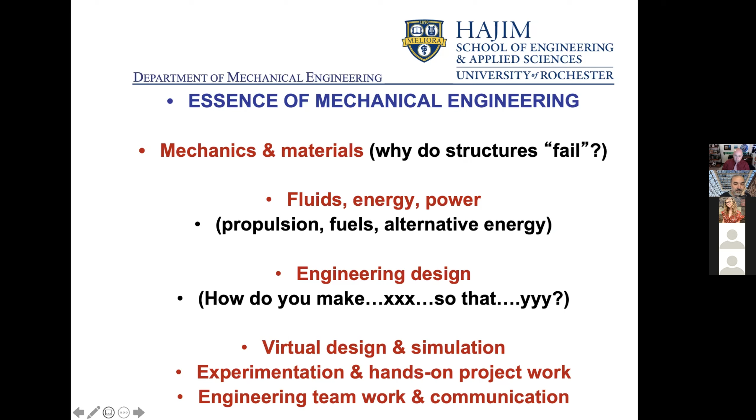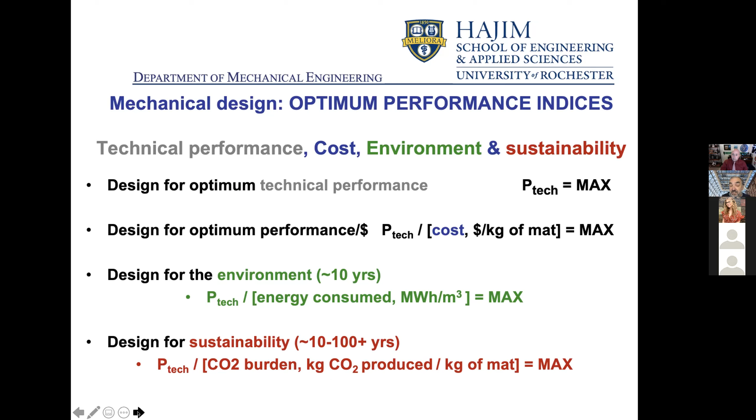One important point I want to make is that engineering, again, is a very social type of discipline. In addition to the engineering design topics I just described - technical performance, cost, environmental effects, sustainability - there are some very important ethical questions that all engineers must actually deal with. For example, there's a very strict code of ethics, professional engineering ethics.

And this is the sort of topic that I will always ask high school students or first year students: true or false. The statement is that engineers, in the fulfillment of their professional duties, must carefully consider the safety, health, and welfare of the public.

And this statement is actually false, because carefully considering the safety, health, and welfare is not good enough. Carefully considering something doesn't mean that we have given the most important aspect in the design to the safety, health, and welfare of the public.

Therefore, the true version of this statement is that engineers shall hold paramount the safety, health, and welfare of the public. Again, there's a very important emphasis on the ethical responsibility of the engineer, because what we design and what we put into practice affects people's safety, health, and welfare.

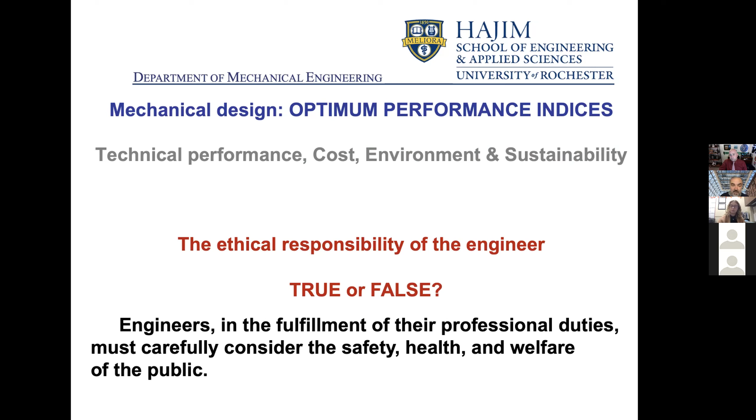Now, again, as I said, there's this list of fundamental ethical tenets that all engineers must live by, and we try to introduce students at the undergraduate level so that they know what to expect when they're actually practicing engineers.

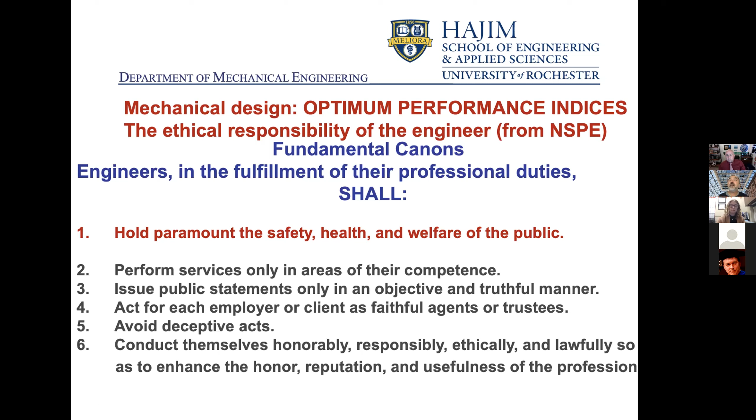Therefore, as you'll see from canon number 1, the correct statement is that engineers shall hold paramount the safety, health, and welfare of the public - not carefully consider. Carefully considering something doesn't mean that you will actually implement it. It must be paramount.

Some applications of mechanical engineering education and technology and research is in designing energy efficient homes, and of course the design of essentially insulating materials. Insulation is a big part of engineering technologies. This is something we all understand: I can have a house that spends a lot of electricity or gas to be heated, or I can have a well insulated, therefore energy efficient home.

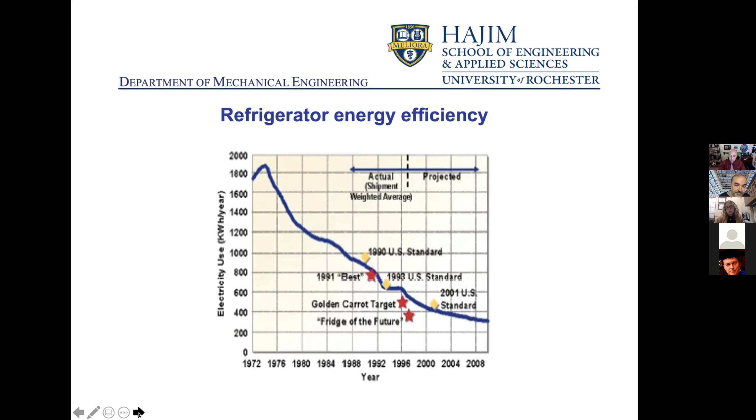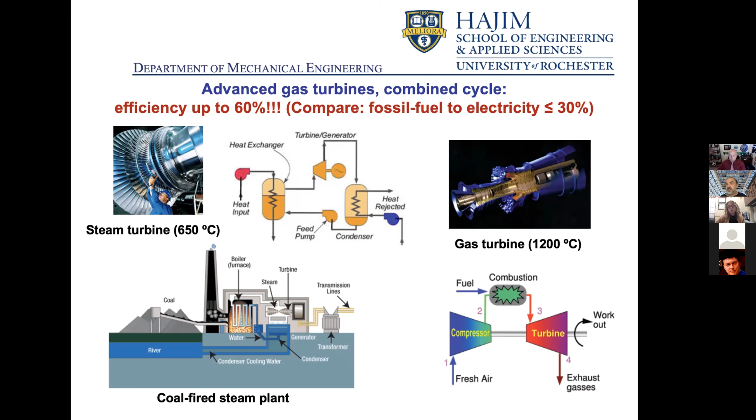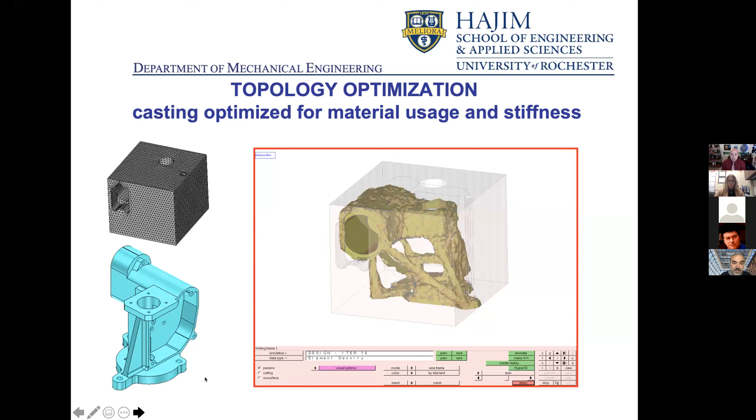Here's another example of another application.

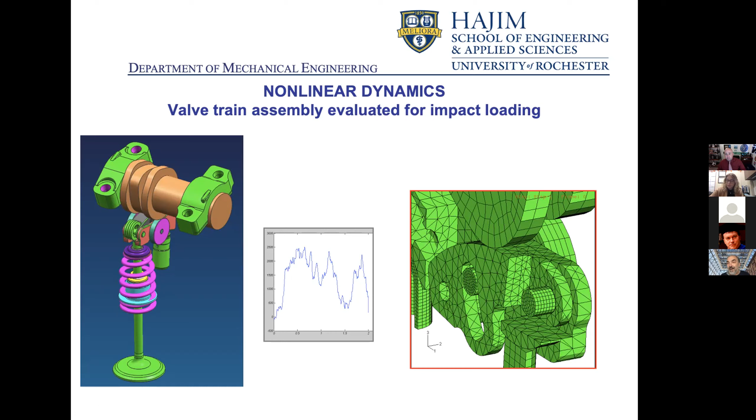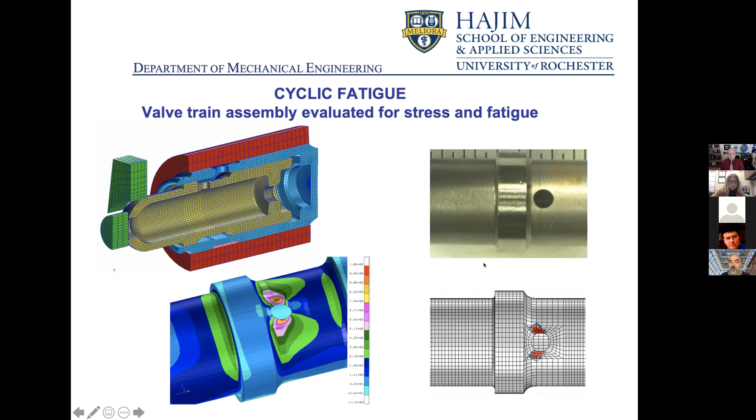Here's another example to show how engineers design in a cycle. Again, on the left-hand side, there's a valve train assembly that has been discretized into finite elements. The finite element simulation shows that around a hole drilled on the surface, one might expect stress concentrations, shown in red on the bottom right. When this structure is actually tested in an engineering laboratory, you'll see that from the surface of that hole, two circumferential cracks evolve. Therefore, we use a virtual design to simulate and predict failure, and at some point these predictions are tested and confirmed in a laboratory.

One other important question is identifying optimal material usage. This is a very common example, because we're asking a question in terms of environmental and sustainability effects. We can design a whole bunch of different containers to contain liquid—for example, a glass container for an expensive liquid such as wine or champagne, a polyethylene container for milk, a PET container for soda, an aluminum can. Are there other materials that can be used for designing containers that will reduce the energy used in making the material, and more importantly, ensure less CO2 production in these consumer-oriented technologies?

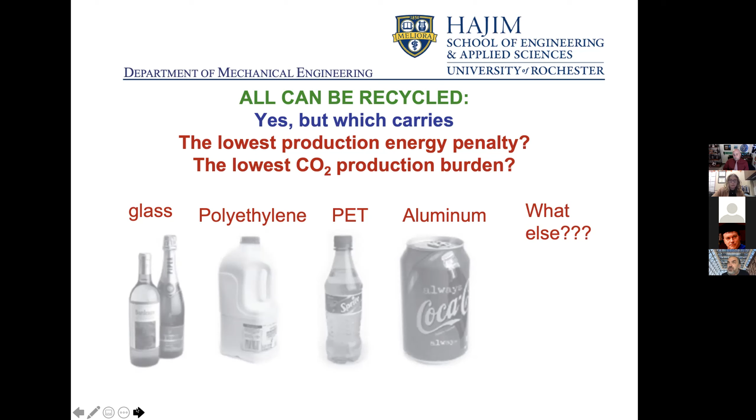So, for example, we do a systematic study where for different types of materials—polyethylene terephthalate, polyethylene, glass, aluminum, or even steel—we examine the weight for each container per liter of fluid contained, the energy required to produce it, how much CO2 is produced per liter of contained fluid, and the cost to produce the container per liter of contained fluid. The point I'm making is that sometimes solutions might surprise us. For example, when it comes to cost per container, polyethylene is very inexpensive, but so is steel. We don't typically think of steel as a material used to contain fluids, but this is a possible application. Therefore, we cannot exclude a possibility a priori unless we analyze it technically.

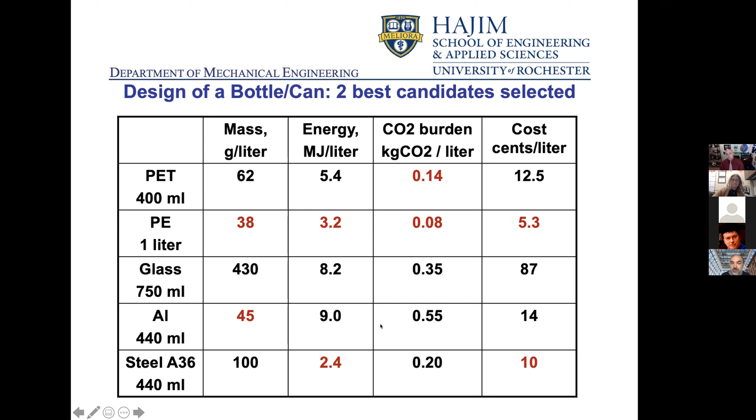Again, the cost of different engineering materials is very important. I have here the 4 broad classifications of engineering materials: metals and metallic alloys, ceramics, polymers or plastics, and composites. On the vertical axis is the relative cost of materials, which can vary significantly. Of course, diamond is very expensive, while glasses and concrete, which are ceramic materials, are very inexpensive, with everything in between. Therefore, cost and performance come into play in selecting materials for engineering applications.

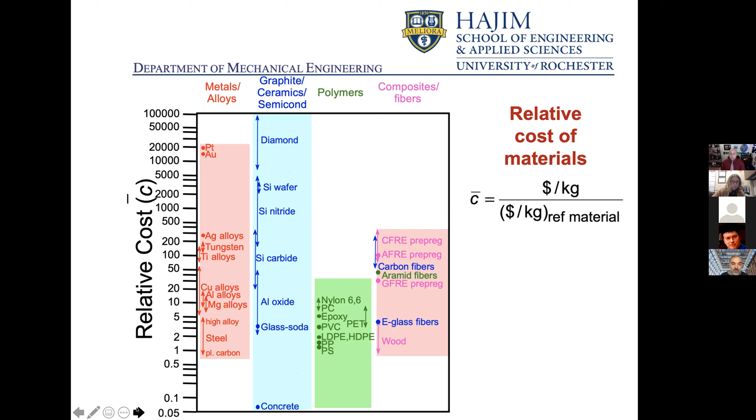Again, the notion in mechanical engineering is that we don't simply design something and forget about it. Instead, we have to think about extracting resources from the earth, producing the material, manufacturing the material and its components, using the material, and then disposing of the used, exhausted, or deteriorated material. Therefore, there's this cycle of material usage, and we must take this into account in predicting how different structures, applications, and designs will have longer term effects, especially at the sustainability level.

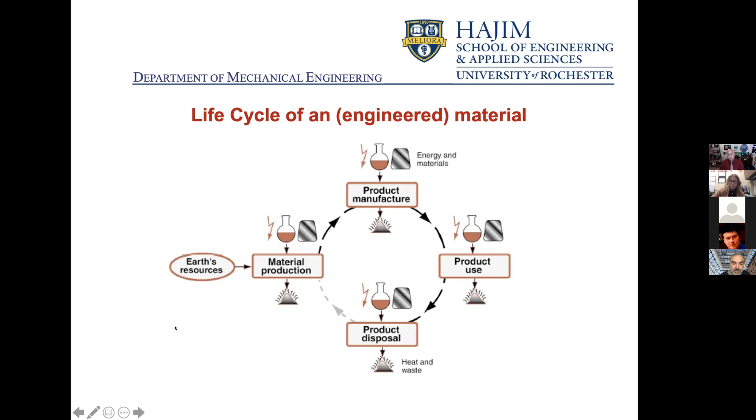Something very fundamental in mechanical engineering is understanding how structures deform. This material could easily be included in a second year mechanics of materials course that we teach our undergraduate students—namely, the difference between tension, bending, torsion, and compression of engineering structures. It turns out that if we understand tension, bending, torsion, and compression, by combining these 4 modes of deformation, we can understand very complicated structures and how they deform.

In understanding the material contribution, we have a given material to make an engineering component, and then there's a macroscopic shape. So I combine the material with its material properties and a macroscopic shape in order to give me the engineering design that we actually desire. You can see that the material and shape can be monolithic, or it can be in this foam-type cellular kind of structure, with big cells or small cells. Therefore, these are options which have been optimized for specific technical metrics and their optimization.

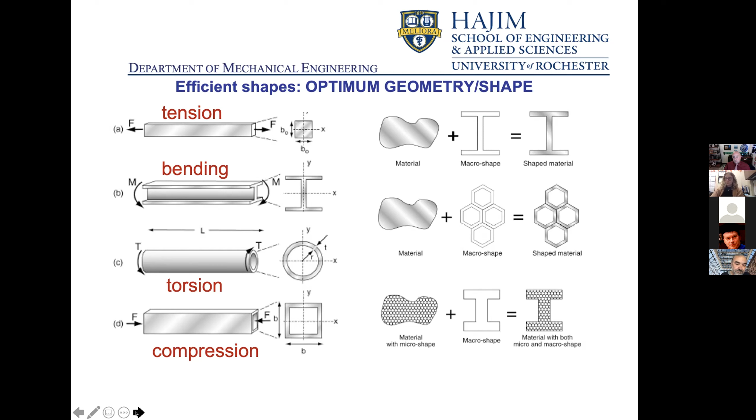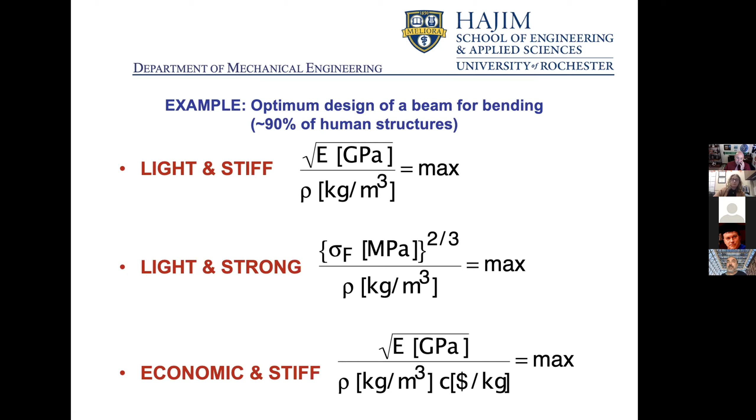Going back to the notion of engineering design, we can design structures which are light and stiff - this is the kind of structure used in aerospace applications. A structure can also be light and strong, also aerospace. Or economic and stiff, which applies to household applications such as cutting utensils, machining tools, and so forth. All of these different aspects of performance are quantified by combining different aspects of materials in engineering designs.

Something a little more challenging to quantify is how to design materials which are environmental and stiff, or sustainable and stiff. Again, we need to combine a whole bunch of different metrics in designing and selecting the optimum material for a given application.

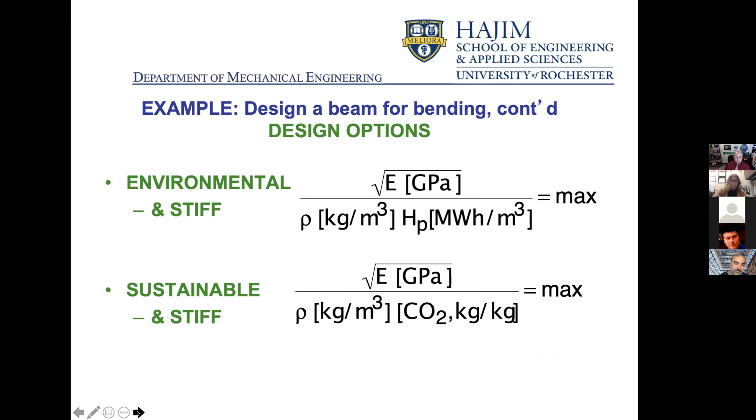I'd like to go into some examples of what kind of projects our students in mechanical engineering at the U of R are exposed to. I'll start from younger projects in the second year, and conclude with projects in the third and fourth year.

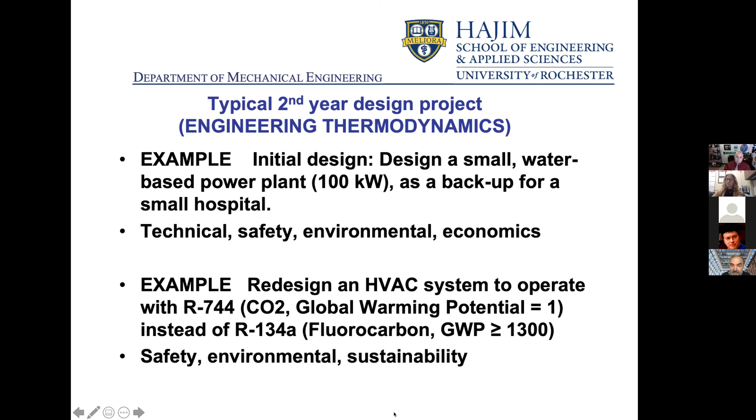The important metric here is the global warming potential, which is 1 for CO2 - the baseline - whereas for these nasty refrigerants, the global warming potential is more than 1,000 times higher. So how do you take a refrigeration system and redesign it to operate with a much more environmentally benign CO2 refrigerant compared to the nastier R134A refrigerant? These are second year projects.

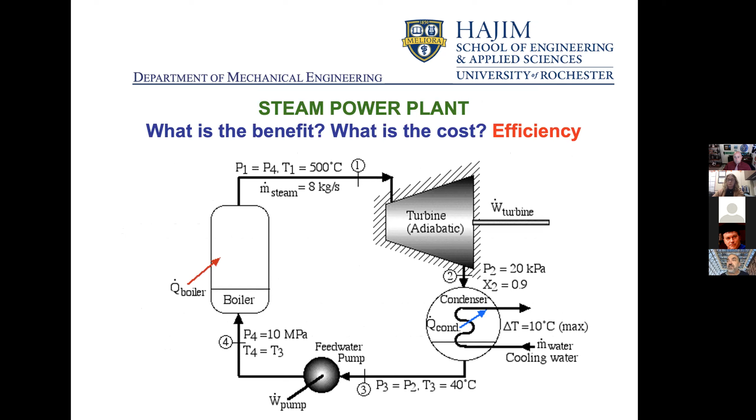Again, understanding the implications of the steam or water-based power plant. I've listed the different engineering components that go into this power plant: there's a turbine, a condenser, a pump, and a heater or boiler. Understanding how these components operate is a very important capability that we teach to our second year students.

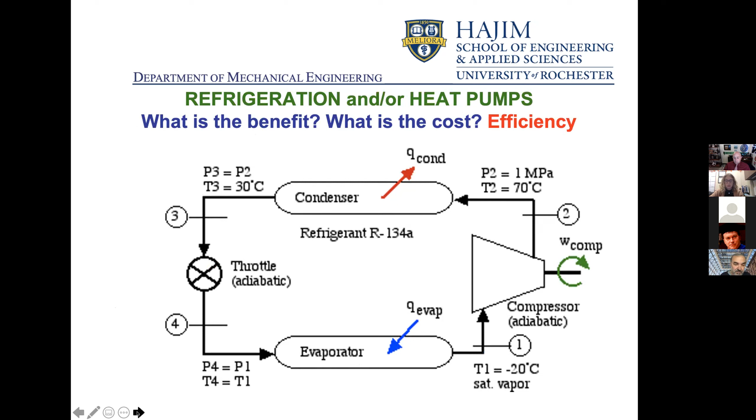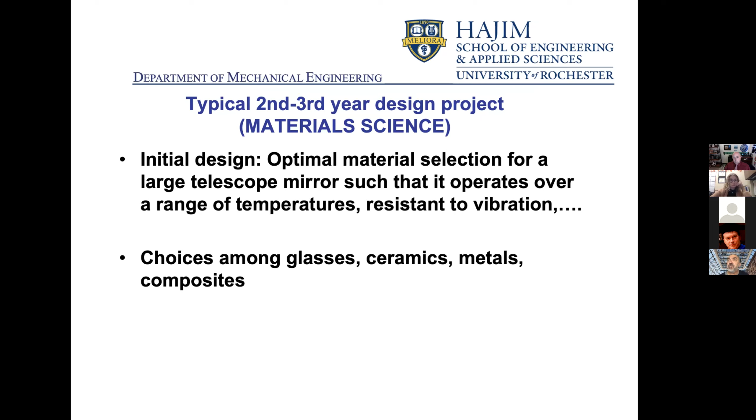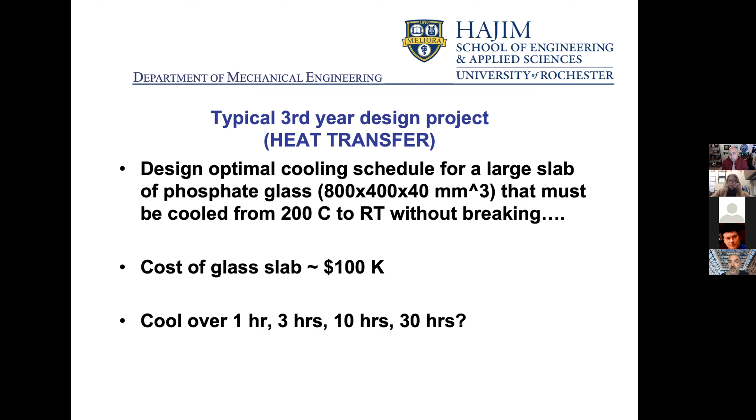I can cool this over a matter of 1 hour, 3 hours, 10 hours, or 30 hours, and of course this makes a very big difference.

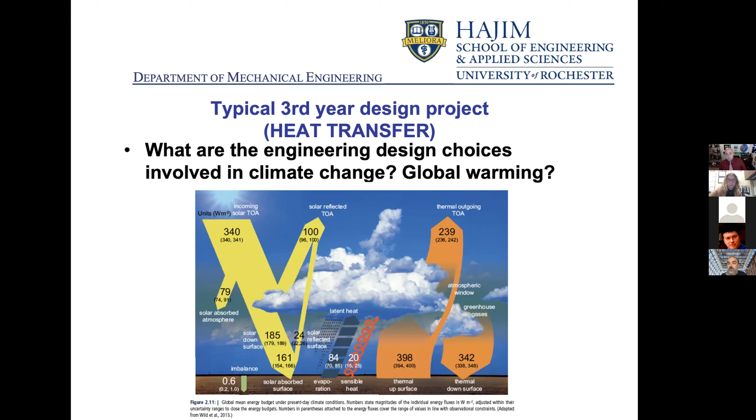This is essentially a heat exchanger. So when we teach heat exchangers in the third year course on heat transfer, we use this global energy budget as one example of heat transfer.

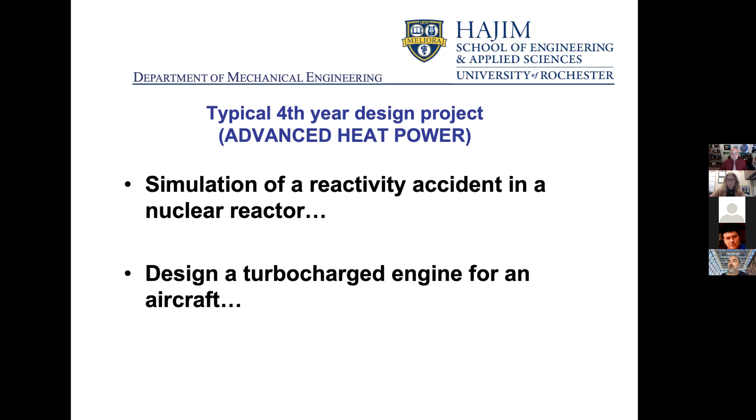Another example is to design a turbocharged engine for an aircraft. These projects are much more involved, much more complicated, and typically take 2 to 3 months to complete the overall design project. In the advanced mechanical design fourth year courses, these are projects students have worked on in the last few years.

One is to design a wind turbine for a third world country using only off-the-shelf components, costing less than $10,000. This is a challenging project because of significant limitations: you cannot have one-of-a-kind components, they must be off-the-shelf, and it must be relatively inexpensive.

Another example, which I'll show a picture of in a minute: design the support structure for a Mylar thin, deformable mirror with an adjustable focal length, so that the mirror operates using sunlight. The idea is that you concentrate sunlight to a specific focal point, essentially converting light power into thermal power.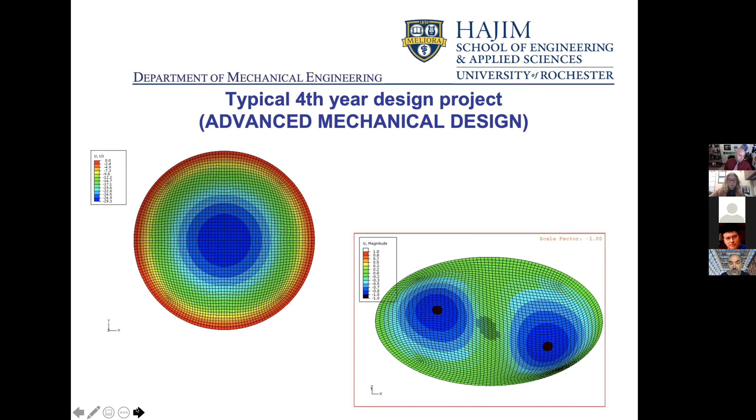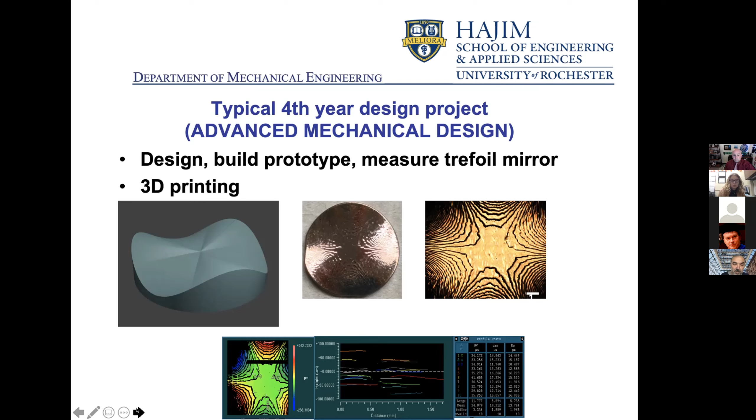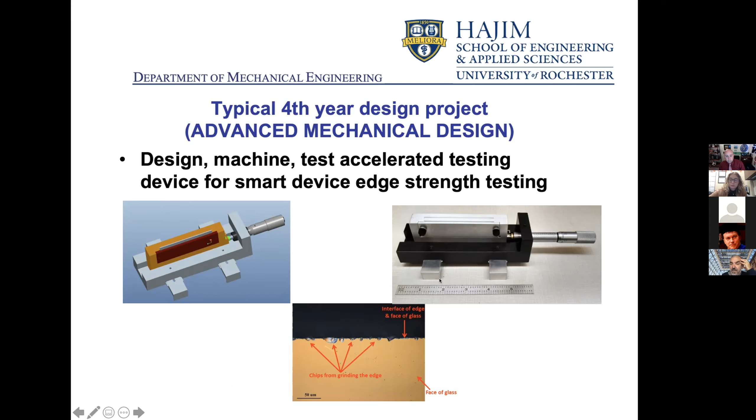Fusion, as you may know, is a very important capability. There's a massive amount of research taking place at the Laboratory for Laser Energetics, where, by the way, many mechanical engineering undergraduates have done internships over the years, and many of these interns eventually are employed by and work at LLE.

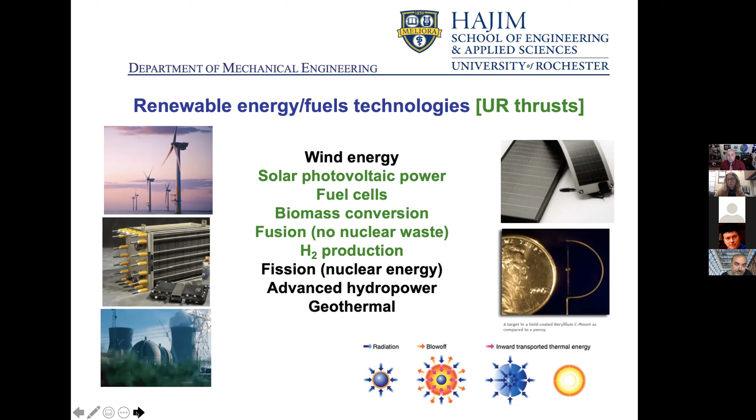An important question that I'll simply pose here, without spending too much time on its implementation or implications, is what do we do with CO2? We put a lot of carbon dioxide into the atmosphere, hence the notion of carbon sequestration: how do I take carbon and simply remove it from the atmosphere and store it safely so it doesn't re-enter the atmosphere? This is a very important question, an important technology that involves mechanical engineering, chemical engineering, and geology.

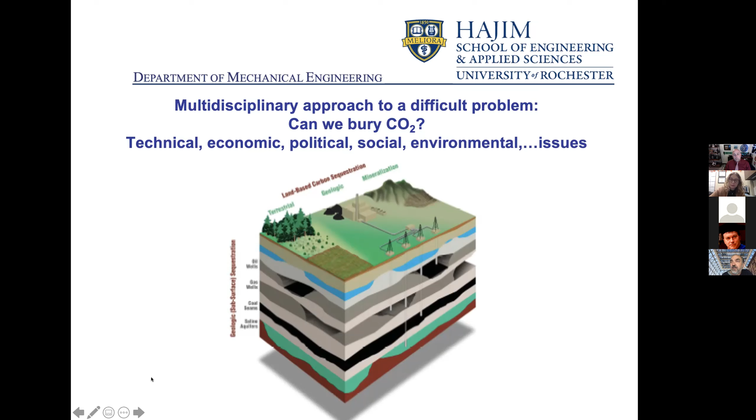Communication, both in oral and written form, is extremely important. We train students extensively in writing technical reports, making technical proposals, defending those proposals, submitting final technical reports, and then making oral presentations of these final reports. That's how engineers work in the real world. Communication is an essential skill because engineering fundamentally is a social practice.

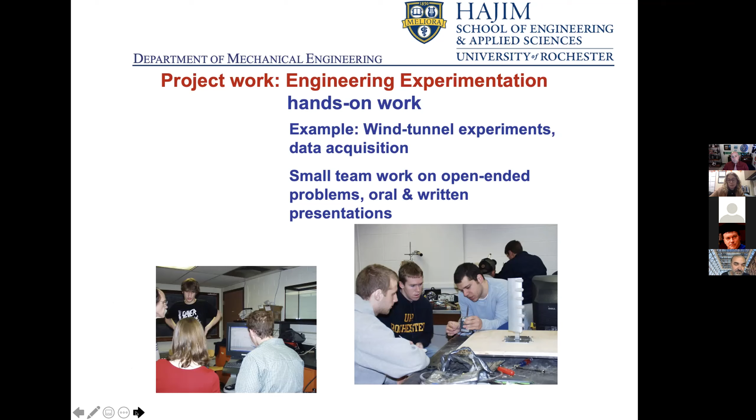Some high school students have done this kind of exercise, but the task here is to actually simulate failure of these balsa wood structures on the computer. Success is not just having a good design; success is when the prototype is tested and agrees with the simulation of the same structure. This is a much more sophisticated view of engineering design: you build something through a virtual design process, and then you test it, so the agreement between the virtual reality and actual reality is what matters.

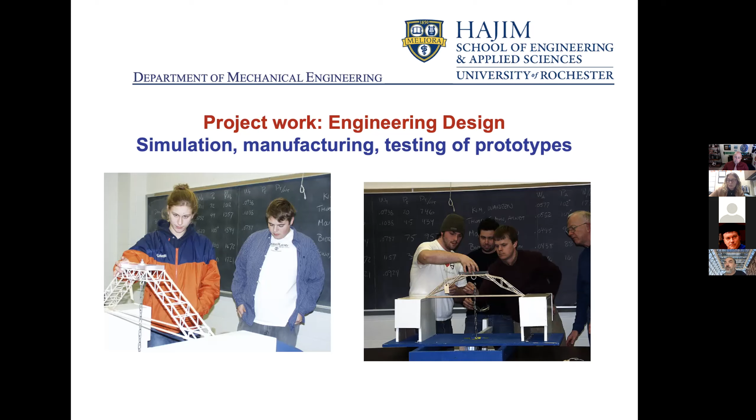There are a lot of student-led projects, like the Mini Baja competition that students have been doing for many years. U of R, both mechanical engineering and other engineering departments, have invested a lot of resources to give students the tools and machine shop skills to design the Mini Baja cart. Every year there are a couple of national and local competitions, and students love this kind of experience.

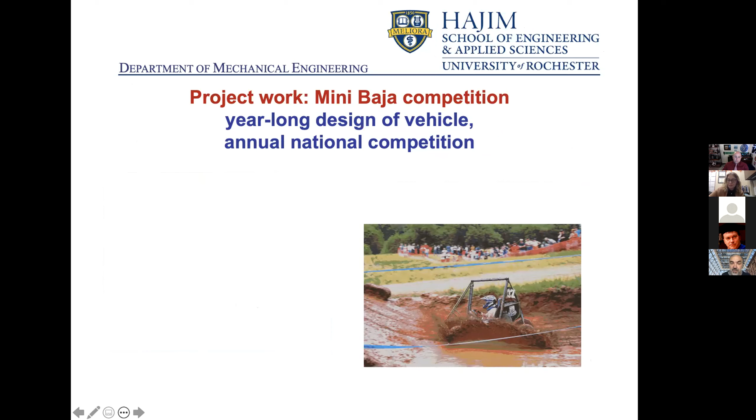Another similar project is Solar Splash, another student-led activity, where the idea is to design a photovoltaic-driven boat and then compete with it. Students build hulls, optimize the hulls, optimize the power conversion using solar cells to turn sunlight into mechanical power, and so on. Again, this is an example of a very multidisciplinary, student-led project.

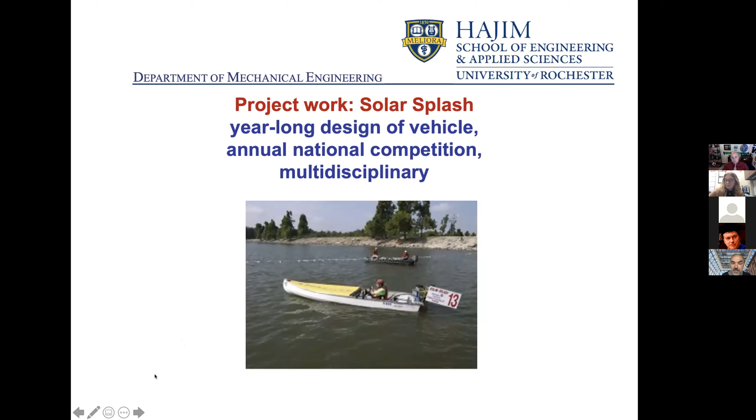What do our students do when they graduate? Typically, a third of them go into graduate school, either for an MS or a PhD, and about two-thirds work in industry. But there are other opportunities mechanical engineering students can pursue: for example, business school, which many students go into eventually or immediately. Some go into law school, a very lucrative occupation, especially in patent law and intellectual property. There's also the increasing role of the mechanical engineer as an entrepreneur—how you design, produce, and demonstrate new structures to solve a specific problem.

In terms of more practical considerations, with a BS in mechanical engineering, typical starting salaries are 55 to 75K. For students who go on and get a master's degree, there's a significantly higher salary that students end up with.

Let me go back to summarizing where mechanical engineers have made huge contributions, and where they are expected to make huge contributions in the 21st century. I started with this slide when we began this presentation—these are the greatest engineering achievements of the 20th century: electrification, cars, airplanes, computers, telephones, and so on. The point I want to make is that by the end of the 20th century, everybody is familiar with all these technologies.

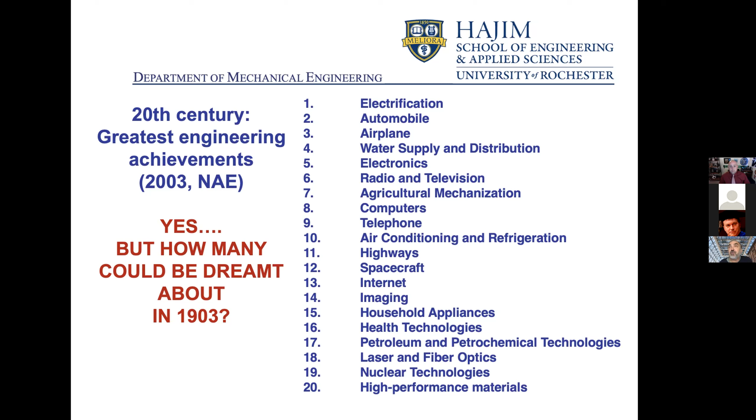100 years earlier, at the beginning of the 20th century in 1903, how many people could think of airplanes, electronics, radio and television, computers, telephones, spacecraft, internet, imaging, and so on? Over a period of 100 years, engineers, and specifically mechanical engineers, have made huge contributions in technology that we use currently.

But perhaps for younger students, it's not so much what mechanical engineering has done in the last century, but what mechanical engineering is expected to contribute in the 21st century. I've listed here the greatest engineering challenges published by the National Academy of Engineering about 13 to 15 years ago. In these big engineering challenges, it's more difficult to distinguish what's mechanical engineering, electrical engineering, chemical engineering, biomedical, or computer engineering. The problems are now much more driven by human needs.

For example, the first challenge, to make solar energy economical, involves chemistry, physics, material science, mechanical engineering, chemical engineering, possibly biomedical engineering. So the important challenging problems in engineering technology for the 21st century, for the students now beginning their university careers, are much more interdisciplinary, much more challenging.

My expectation is that as we address these new problems, the groups of people addressing them will not be singly identified as mechanical engineers, electrical engineers, biomedical engineers, optical engineers, or chemical engineers. We now need combined skill sets to address these problems simply because they're much more challenging. That's basically the presentation I have in mind.

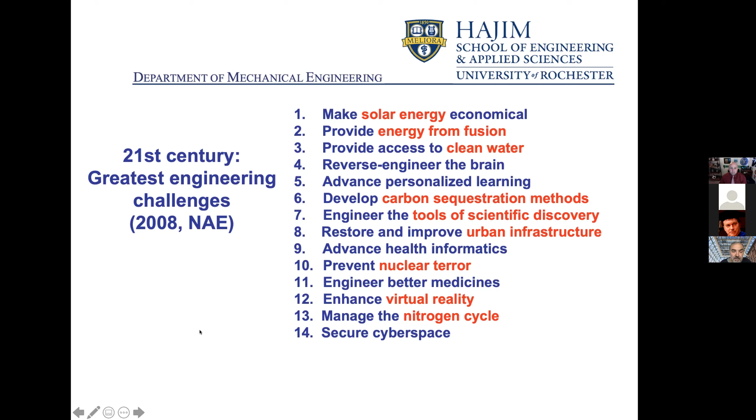Yeah, thank you for that. I feel like we covered so much ground between where we've been and where we're going.

Having read a lot of entrance applications for students interested in mechanical engineering, they cite auto, aerospace, or structural engineering because that's what they're typically exposed to first or in the greatest amount. Can you tell me, besides those three, what areas of engineering do a lot of students not know about, and what is one of the more popular ones students seek outside of those three?

In my opinion, the most important skill that all engineering students get is problem solving. Problem solving skills are not learned in one week, one month, one semester, or one year.

You develop this through the engineering curriculum. Your brain starts to think about taking a large, challenging problem, breaking it into smaller pieces, solving each piece separately, and then synthesizing the overall solution. This is something engineers do, but it's not a kind of skill learned over a short period of time.